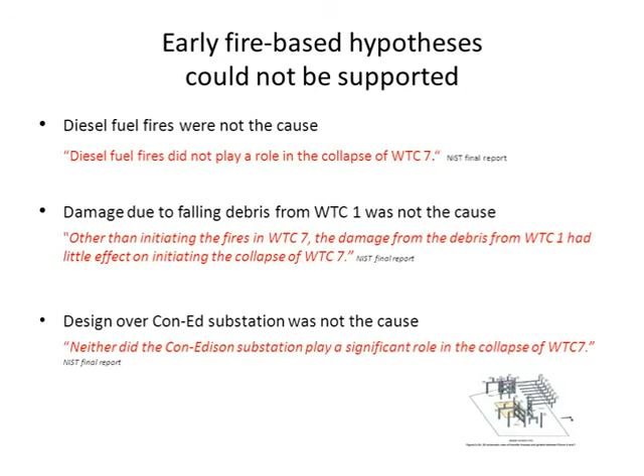The NIST investigation began in May 2002, and NIST put out an interim report on Building 7 in 2004. 2 years later, in 2006, NIST's lead investigator made it clear that they had little or no idea what happened to Building 7. We might wonder how anyone could have predicted this building would collapse, given that 4 years into the investigation, government scientists had no idea what happened.

But in 2008, NIST said that what happened to Building 7 was obvious and that science was behind a new explanation. We're going to take a close look at NIST's final theory and discover for ourselves whether or not it is obvious. But we should remember that it is entirely computer-based. NIST did no physical testing at all to support its Building 7 report.

Here's a photo of the area showing the critical column, column 79, that NIST said first failed in Building 7. NIST says fires on the northeast corner of floor 12 heated the ceiling that included the floor beams for floor 13, causing thermal expansion of the beams, which caused the girder at column 79 to fall off its seat. NIST says that column 79 buckled due to the loss of support from that girder, and then the whole building collapsed in a matter of seconds.

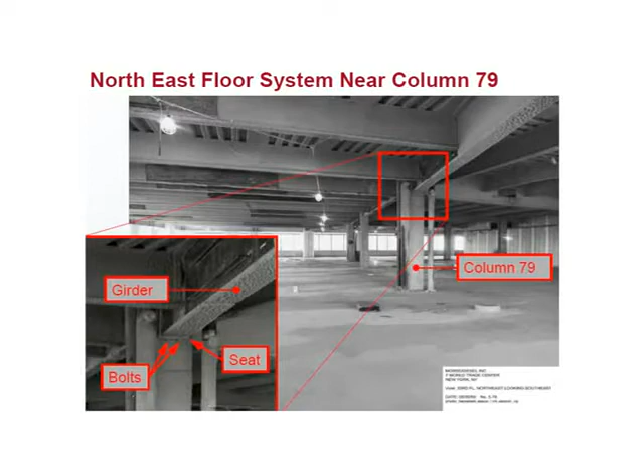Here's a diagram that shows NIST's view of how the floor beams on the northeast side of the building, shown here as purple lines, pushed against the critical girder. The girder connected column 79 to the external wall at column 44. The girder to column connection is blown up in the inset diagram, showing how NIST envisions that the girder was pushed off its seat. On the bottom here you can see the pictures that NIST used in its media presentation when it unveiled its final report. The picture is reversed again, but you can see the general idea.

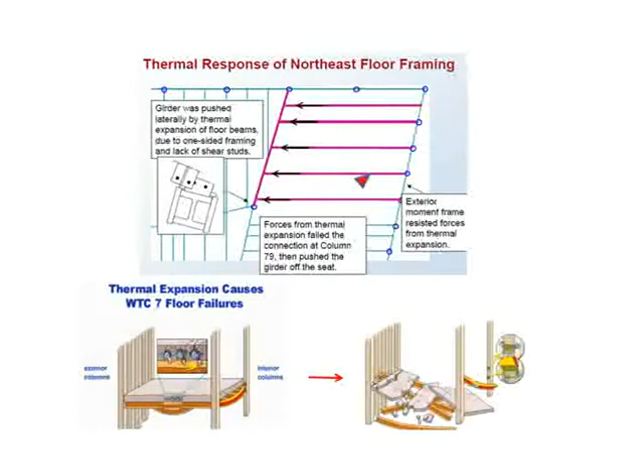The NIST interim report from 2004 said that most of the beams and girders were made composite, or one piece with the slabs, using shear studs. In a deceptive turnabout, NIST did a reversal in its final report and said that no studs were installed on any of the girders.

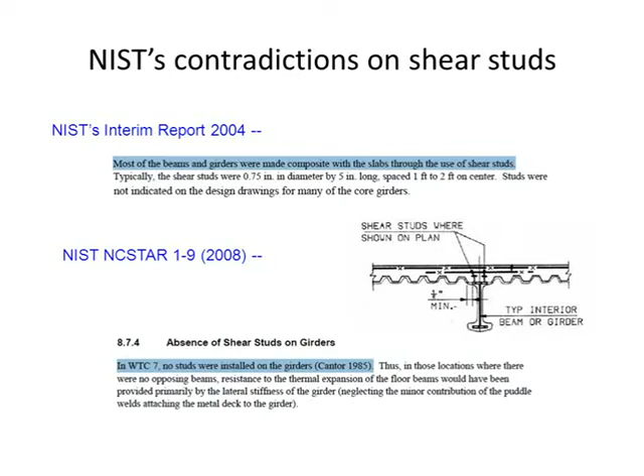Unfortunately for NIST, it was not just its own 2004 interim report that contradicted this vital aspect of its final theory. The presence of shear studs on all the girders was also described by John Salvarinas, the project manager for Building 7, from the company that supplied the steel components. This diagram from an academic paper that Salvarinas wrote in 1986 shows that there were 30 shear studs on that critical girder.

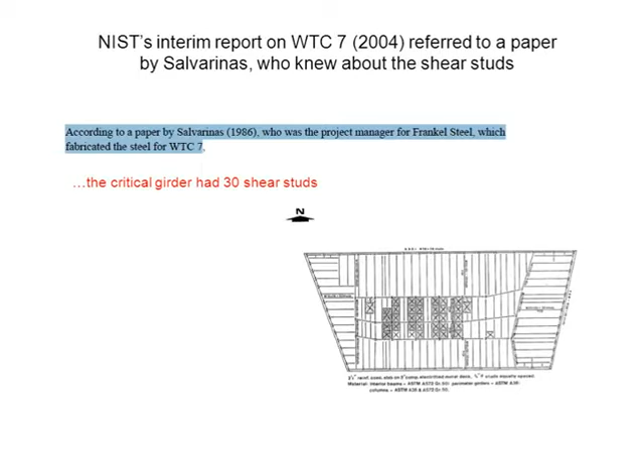NIST claims that thermal expansion caused the breakage of over 100 high-strength bolts. The mechanism that NIST claims caused all this damage is called differential thermal expansion. This is when the expansion of the beam is much greater than the expansion of the concrete floor slab above it.

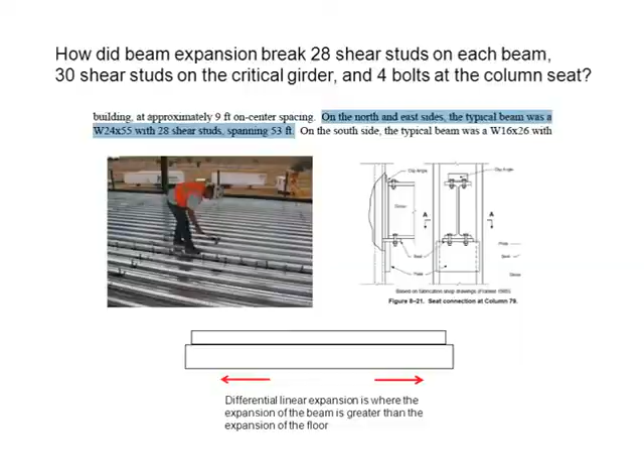Thermal expansion is not a new phenomenon, as NIST suggests, but has been a consideration throughout the history of structural design. You can see that point made here by two building professionals from Australia who wrote a response to NIST on its Building 7 report. These building professionals reported that they had actually done physical tests to see what thermal expansion would do to floor assemblies. These were just the kinds of tests that NIST should have done.

Because they had actually done the tests, the Australians were able to state that the shear studs would not fail, because in a building fire the floor slab was heated as well, and the entire composite assembly would expand together. So NIST's final theory is at odds with actual experimental evidence from the testing of real floor assemblies.

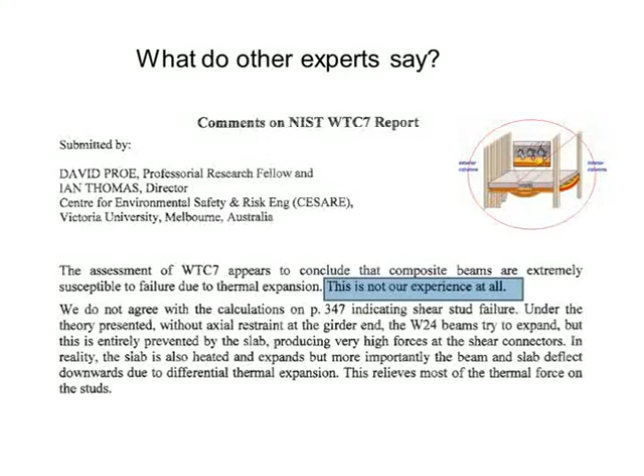Another thing we need to understand is just how far that girder would have had to be pushed for it to walk off its seat, as NIST suggests. NIST reported that the seat for the girder at column 79 was 11 inches wide, and therefore the girder had to be pushed at least 5.5 inches, or half of that distance, to walk off the seat. You can see that claim here in an excerpt from NIST's report.

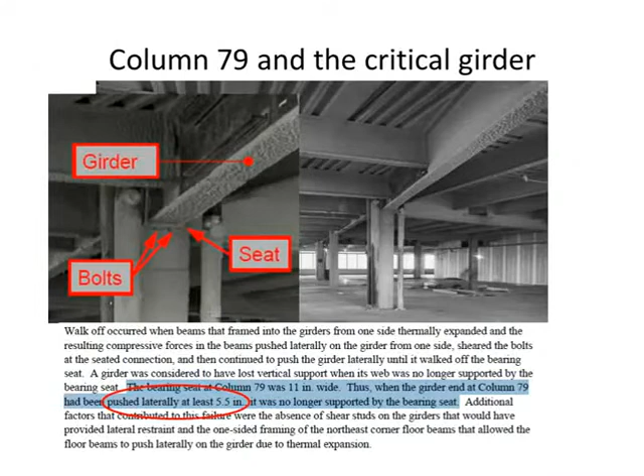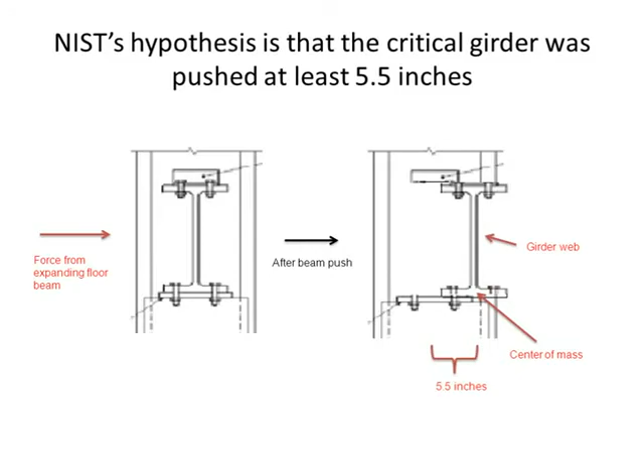To repeat, NIST's final initial failure mechanism for Building 7 was that the critical girder was pushed 5.5 inches by the expanding floor beams. The 5.5 inches was needed in order for the vertical web of the girder, and therefore the center of mass of the girder, to move off of the seat. Because thermal expansion is a function of temperature, we need to know what temperature NIST says the beams reached, so that we can estimate how much they expanded.

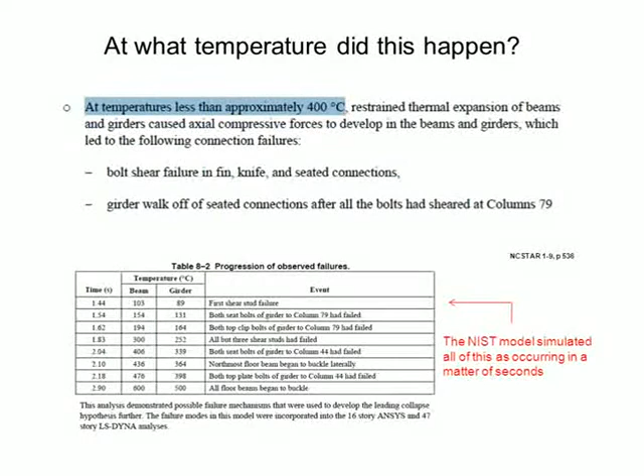This was a tricky question for NIST because at temperatures as high as 600 degrees Celsius, the steel will lose strength and stiffness, and therefore not be able to extend into the girder. At the same time, if the temperature is not high enough, there wouldn't be enough expansion of the floor beams. What NIST settled on was the idea that the beam temperatures reach 400 degrees Celsius on the northeast corner of floor 12.

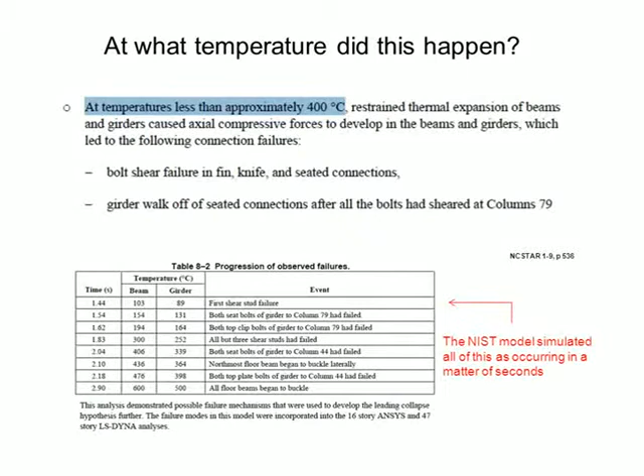On this slide you can see an example of just how tenuous NIST computer models were with respect to reality. NIST computer model had all the steel heating to extreme temperatures and all the bolts and other connections breaking within a matter of about 2 seconds. This is an example of how NIST computer modeling was not realistic.

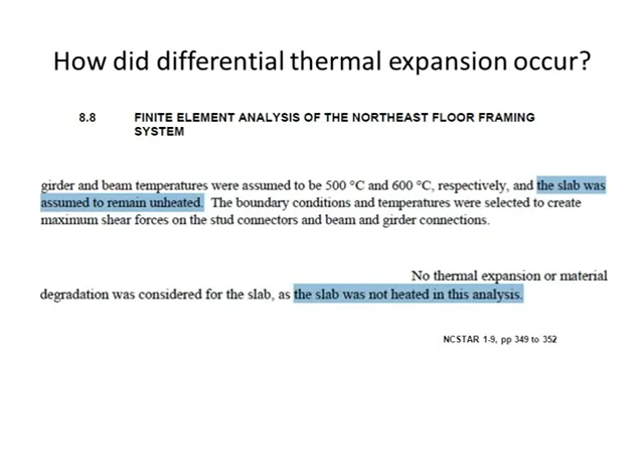Once the temperature distribution needed for its theory was settled, NIST found a way to suggest that the differential thermal expansion could be possible, at least in the computer. They simply didn't heat the floor slab in the computer model. This is what most scientists would call fraud. But NIST's theory has more problems than that. Given NIST's temperature scenario, the amount of expansion by the beams would not satisfy the amount of expansion that NIST said was required, or 5.5 inches.

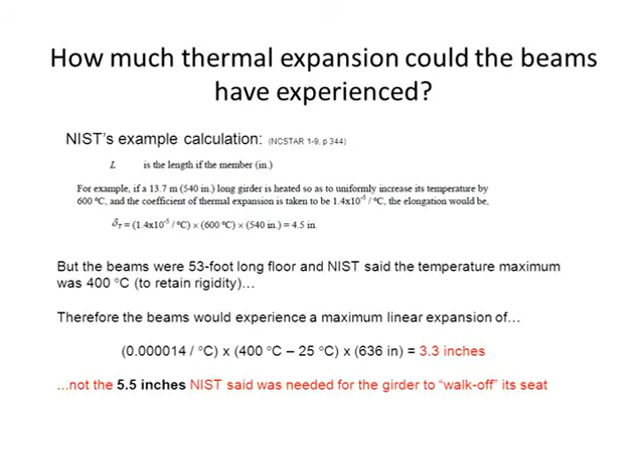NIST provided an example of the equation that scientists use to calculate thermal expansion. When we put the correct values into the equation, we see that the maximum expansion would be only 3.3 inches. And as we already know from NIST, 3.3 inches would not be enough to cause the girder to walk off its seat. We know from the physical dimensions of the girder and the seat that the girder would have had to be pushed at least 5.5 inches for NIST's very improbable scenario to even begin.

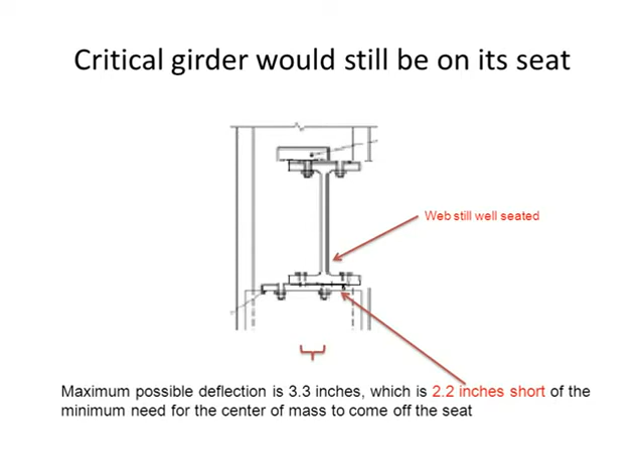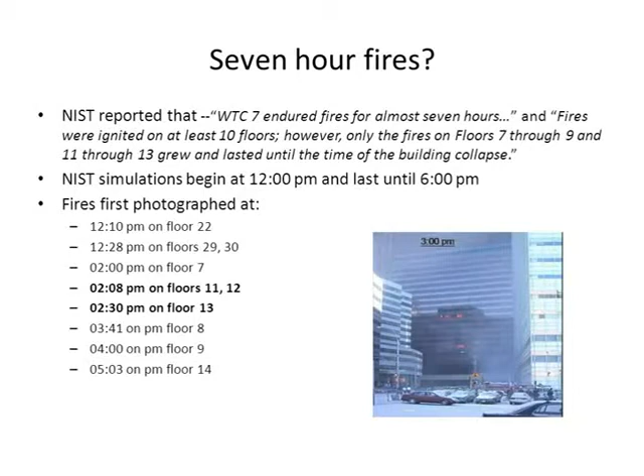Another thing NIST said was that there were 7-hour fires in Building 7, which gave the impression that the fires were very long and very hot. But early photographs did not show fires on floors 11 through 13, where NIST said the first failures occurred, until after 2 o'clock. And the building fell less than 3.5 hours later, so there could not have been 7-hour fires.

Underwriters Laboratories provided the fire resistance information for Building 7. There were requirements for fire resistance of the columns and floor steel in Building 7, just as there is for any skyscraper. The requirements were that these steel components had to withstand 2 to 3 hours of intense fire in standard tests.

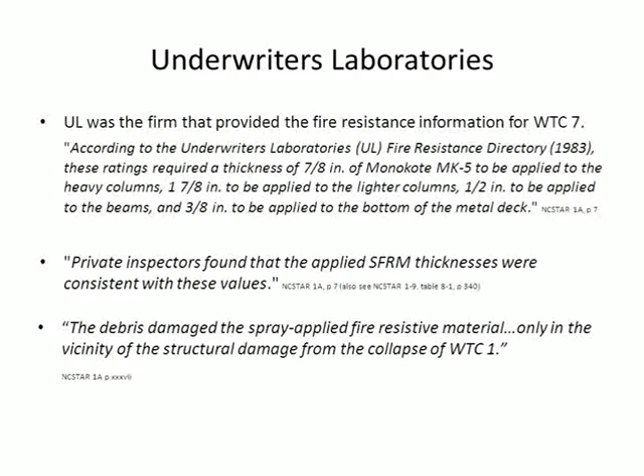One big contradiction that NIST avoided is that its investigators knew that the fire load in the building would only support about 20 minutes of fire in a given area. When the NIST report talks about several hours of fire, it is deceptively talking about the time a fire lasts anywhere on a floor, not in one specific location. Underneath a floor beam, for example, the fire time is only about 20 minutes, as this exchange from a NIST advisory committee meeting indicates.

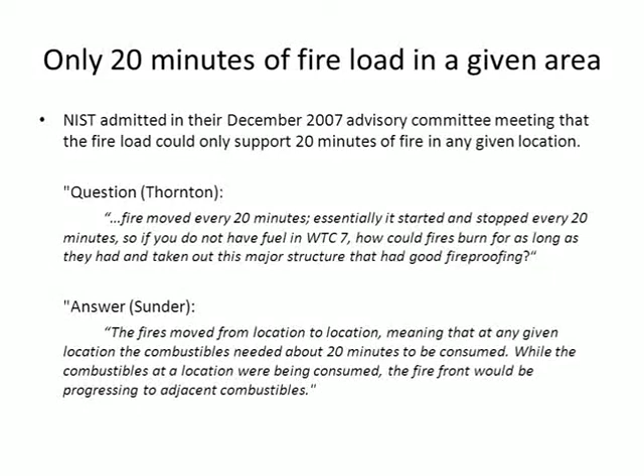We should be able to verify how long the fires lasted in a given location because there are photographs available from various times during the day. But it turns out that NIST did not use the photographs to verify its computer simulations. As you can see from this comparison of a photo in NIST's report taken at about 10 minutes to 4 and the NIST simulation of fires on floor 12 at the same time, there's no correlation between NIST simulation and what really happened.

At approximately 4 o'clock, NIST computer simulation shows raging fires across the north side windows of floor 12. The photo from about the same time shows no fires in that area at all. NIST admits that its models did not use, quote, the observed fire activity from photos and videos as a model input, unquote. Again, this is not science, and this is another example of why the NIST report is false.

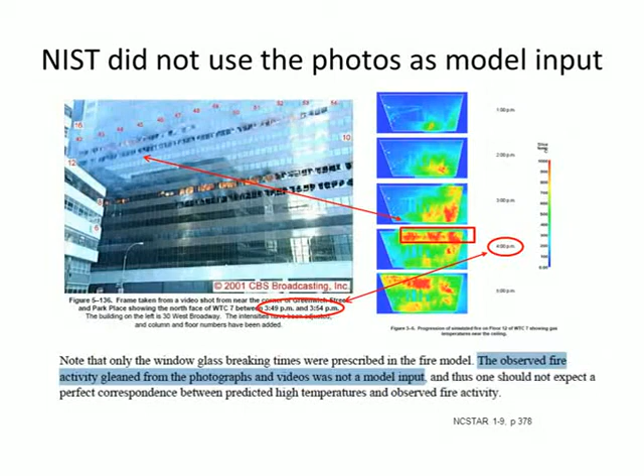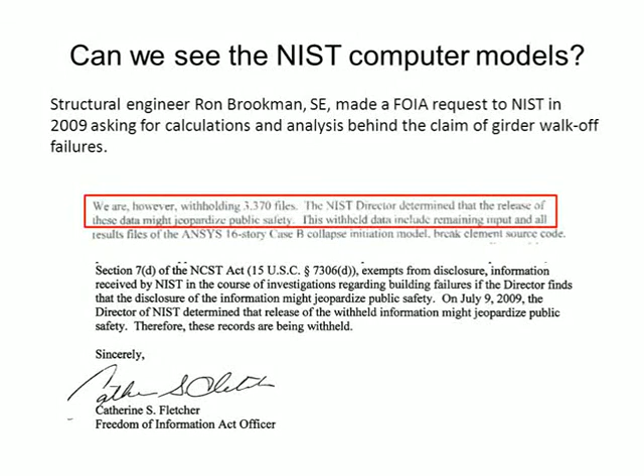Regardless of the fact that the NIST World Trade Center 7 report is false in many ways, we would all like to see how NIST reached its conclusions, but we're not allowed to see those things. NIST tells us that release of that information might jeopardize public safety. But our safety has actually been jeopardized by NIST itself and its lies about what happened at the World Trade Center. NIST failed to explain why and how Building 7 collapsed, and a new investigation is needed.